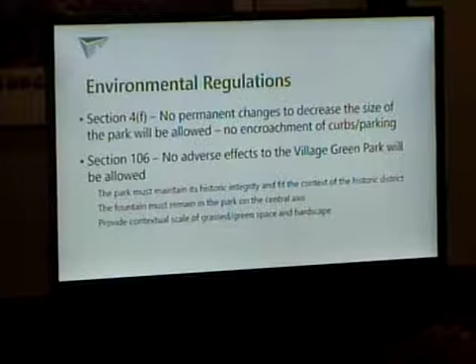Diving down a little bit deeper, that means the fountain has to stay within the park. It adds to the historic fabric of the park, and it needs to be on that central axis where it's located and where it's been in the design concepts presented. We need to provide a park with the right feel, the right contextual scale, and the right mix of grass and green space combined with hardscape. Consider that as we go through these concepts.

Very quickly, I wanted to touch on the process so far, where we are, and the next steps. We gathered a lot of information about the sites. We've been working on the project now for several years, as Jim pointed out, but really dug into this landscape design earlier this year.

In the spring of this year, we got together, brainstorming, with a public meeting in June. We developed design concepts as a team from June to September, and got back in front of the public in September to present those initial concepts.

We've gone away and, based upon that public input, done additional refinement. Mark presented to the select board in November, and as a result of that meeting, we got asked to present as well to the Planning Commission and the Design Advisory Committee. Also in November, and just last week, we refined the concepts a little bit further.

So here we are today, public meeting, December. Coming out of this meeting, a little bit more refinement, and then ultimately our goal is to present a recommended alternative to the select board at their next meeting on December 11th, so next Tuesday.

We're gathering all the input we've received through the project to date, input from the public, the environmental side of things, input from the town boards and committees, putting that together with some principles in landscape design and landscape architecture, and making a recommendation to the select board, ultimately asking for their endorsement.

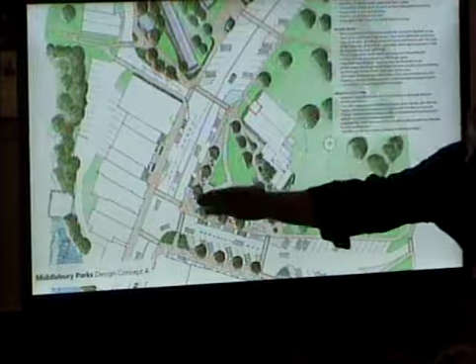Connectivity to both parks, to the riverfront and Marble Works. In this sketch, this is Main Street, here's Merchants Row, the Battell Block, St. Stephen's, down Painter's Alley there, Printer's Alley, that leads you to the riverfront area in Marble Works.

As Aaron went through, the inclusion of the historic fountain was a requirement through the permit process. Integration of the church memorial garden and connectivity of that back to the main part of the village green.

And this sketch here that we had is basically organized with street trees along the edge, 30 feet on center. What do you mean a street tree? Big, like canopy shade trees, to define the edge of the walk. There's a sidewalk along in front of that.

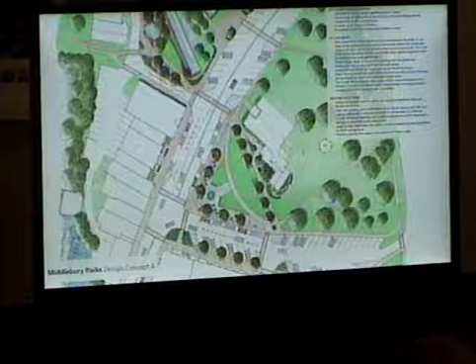There's the historic stone ashlar blocks we're reusing from the tunnel as benches. Is there a chance you could use the microphone? Well, the microphone won't help, unfortunately. These microphones are only connected to the recording equipment, it's not a PA system. Sorry, there's some seats up here.

With the desire to have more plaza space than what was in the original park, we made these areas 20 feet wide.

We're suggesting movable tables and chairs under those. The fountain got moved closer. This arcing path comes across through here. So this is all flat and one big plane, so you can use it multiple different ways. There aren't grade level changes going on in it.

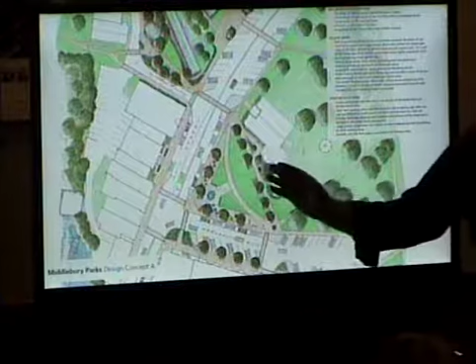Went back this way by the memorial garden. There's a row of trees here that are lower to the ground, like an apple or a flowering type tree. That allows some sense of intimacy back here, but you still look over those to the historic architecture of the church that's providing that three-dimensional architectural frame on the backside.

You go to the park, Lazarus Park. We showed a couple options here. Here's a simple path coming down at 10%. There's a couple seating areas and lawn, and then a hardscape at the bottom, and once again shade trees line it. That connects right across to these guys.

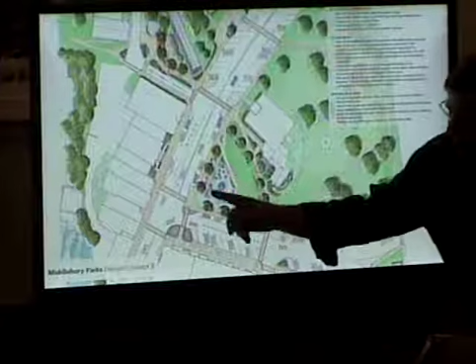The second option, after we talked with the select board, we made the hardscape plaza area even bigger. We still kept the street trees delineating the edge, which is a historic feature to the park, part of keeping that historic character that Aaron mentioned. Slightly different configuration here, and then a simpler layout down there where we're closer to the street and there's no lawn actually presented.

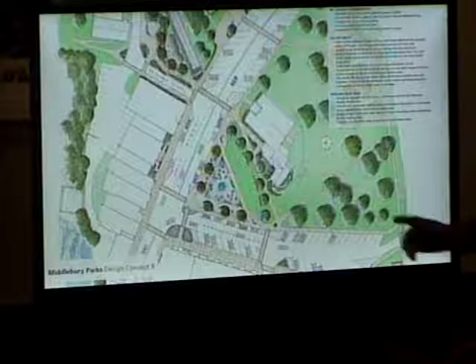You can see in both these, the fountain and the memorial garden are on the historic axis.

I think it's probably worth pointing out that these two options were developed following the input in the September public meeting. Mark had gone back through—you need to speak loudly for people—understood. Mark had gone back through all of the input received so far, all the input from that meeting, the ideas and brainstorming, and had really worked on developing these concepts.

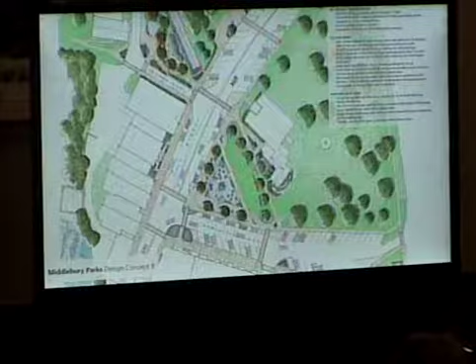These are the same concepts that were presented to the select board at the end of November and presented to Planning Commission Design Advisory Committee. And last week we received input from every single Planning Commission member and Design Advisory Committee member and the public that was there. And then I've made some adjustments to try and incorporate some of those ideas in.

So we don't have a third option, but as we had talked about for our process, we've got a working draft going for incorporating those main themes, making some tweaks before we get ready to present to the select board. So we're going to talk about our working draft.

Some of the main themes that we heard were to increase the hardscape in the village green beyond what was shown in Concept A, to increase flowers and plantings in the village green area, to include pedestrian bump outs at the crosswalks. They were shown on Merchants Row in one location, so to show those at additional locations.

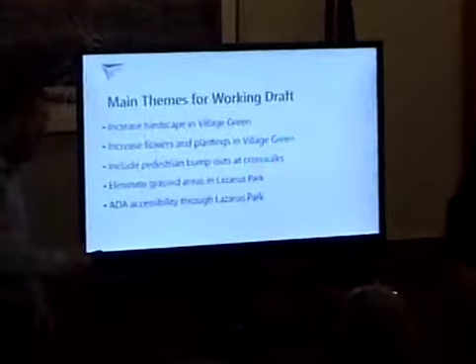What's a bump out? Talking about something like this here. Is it higher on the road? It's only about an inch or two higher. But a bit higher, so it looks obvious, is that the point? Correct. It's a different material and texture. Yeah, similar to what you'd see at the roundabout here. Right.

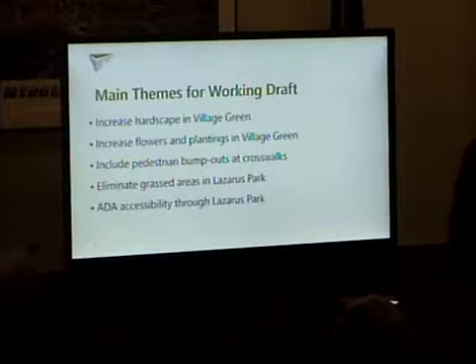Eliminate the grassed areas in Lazarus Park. There was a few comments about that—perhaps Concept B that was presented was better from a maintenance standpoint. There were also several comments about ADA accessibility through Lazarus Park. We're going to show you a concept that does incorporate ADA accessibility. However, it spills onto the neighboring property, so it's not all within the town property. There may be a possibility to work with the town on seeing if that's feasible, but to make that work we had to spill beyond our limits.

So, Mark, do you want to just walk through the modifications or changes that you made? Okay, so we started back with our Plan A and went through tweaking and adjusting things to try to adapt to what we heard from last week's meeting.

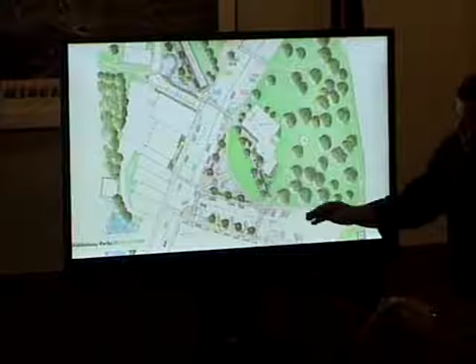In this scheme here, for the request for more hardscape, we incorporate—these used to be grass panels in this area, they become now more of a pervious paver material. The fountain moved even closer to the street, now 20 feet forward from its original position. I thought that gave much more flexibility to use for the whole centerpiece of the park.

And can we pause there just for a moment? Some of the coordination that we've done related to Section 106, that historic contextual feel of the park, coordinated with Judith on this—this is the maximum amount of hardscape that we can design into the project. So we've heard loud and clear, more hardscape. This is really the maximum amount.

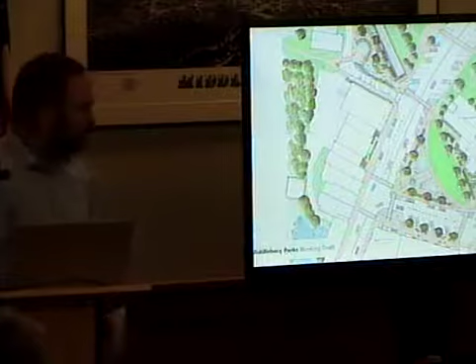Maximum based on historical concepts? Yeah, historical context. From a scale standpoint... hold on. So just out of curiosity, what was the rationale for increasing the hardscape as opposed to having more lawn and so on?

There was some sentiment that hardscape may provide for more versatility of use throughout the entire year. In the winter it could potentially be plowed, and in the spring during mud season it would still provide a stable surface.

For scale, the distance from here to here is about 60 feet, about the width of Church Street. It's a nice scale for an urban hardscape that still feels reasonably comfortable without feeling like you're out in the middle of a parking lot somewhere.

Going on with that, we incorporated the request for more flowers. Traditionally these edges had berms and plantings and a variety of plant materials, so combining use of the ashlar blocks with planters in front, while still allowing access into the park at each of these places. Those big stone blocks are part of the tunnel construction.

So, Mark, I wonder if we just pause there for a moment and point out the differences between concept A and this, specific to the street edge. Yeah, in this scheme you can see right here...

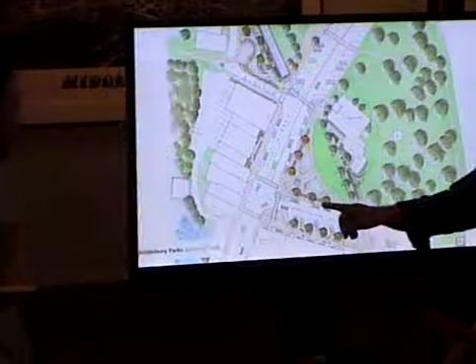There's a bench and then a flower bed in front of that. They could be pollinators, annuals, or perennials. Then on either side of the tree there are 5-foot walks and a flat grate, so it's 15 feet wide open. You can walk into the park anywhere you see a tree.

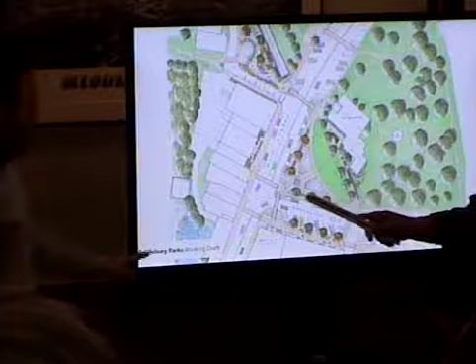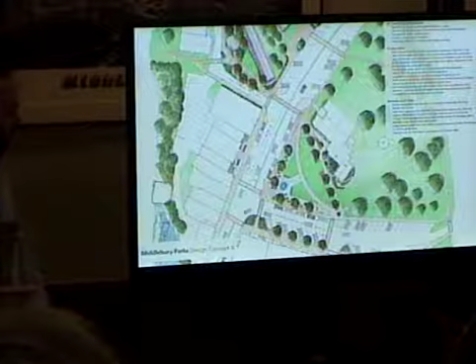Let's flip back to the other concept so you can point that out. In this version we were suggesting movable tables instead of the benches, and the ashlar blocks actually go perpendicular next to the tree, so you get roughly a 20-foot space in between for the tables and things, instead of the historic stone blocks.

Everything's still on axis. We've located the utilities on these plans because there's a lot of concern about connecting in and sweeping this corner. Unfortunately, this whole corner is one big utility bank of transformers and poles. There are existing utilities there today, pre-project, and we've actually added a single-phase transformer to eliminate the poles in that area, but it does add to the utilities there.

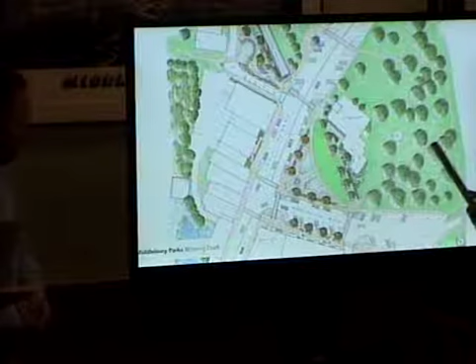But it's all coming together here with this existing path coming in, a new crosswalk across the street with a bump-out here to shorten the pedestrian distance. Over on this side, here are the bump-outs suggested last week, making it so people don't feel like they're crossing as wide a distance. That connects to this area at Lazarus Park.

We've opened up the front of this based on some of the things we said, and then it's calculated out. Handicapped access requires a certain maximum slope on a ramp, like 0.083, or 2.5 feet per every 30 feet. You can't go beyond that without needing a 5-foot landing area, so you need a certain length to achieve the 11-foot drop to get down there. This is worked out so you come downhill to a landing here, and then there's a path that comes back around the back side of that sitting area.

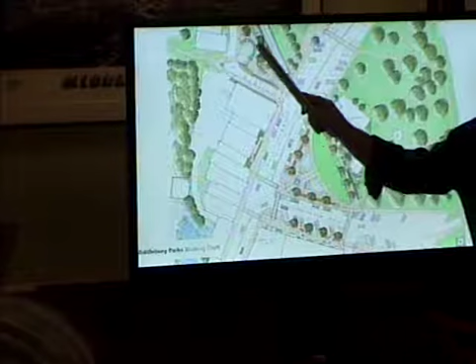And so we talked about potential property line issues. In order to make that work, we had to push really further onto the MarbleWorks property, as shown here. The project does not own that property right now—this is just kind of a potential solution. It's owned by MarbleWorks.

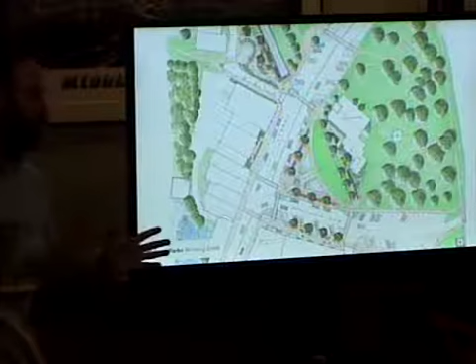Excuse me, Aaron, if we have questions as you go along, would you rather we hold them? I think you can—if you've got something specific about what we're talking about, feel free to ask.

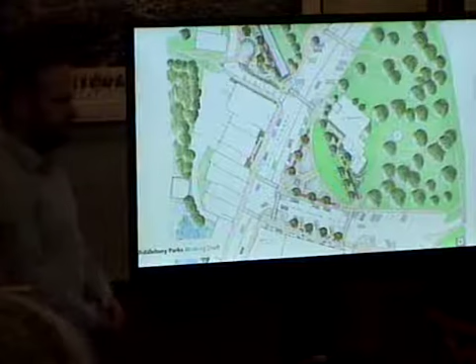My one question was, right now there is one utility pole right in what I would call the southeast corner—yes, right about there, except down a little bit. And there's one remaining utility pole. Is that going to be removed, and would it be underground? And there's another one that goes across up toward Main Street—will that still have to be there?

My understanding is that the utility pole would be removed. It will be moved? That's my understanding, yeah. Okay, I think there's one line that remains to service a...

Right, yeah, it goes light, right across the park. There's a light in the park and it could potentially be served from the Court Square area instead of from this pole. Okay, thank you.

Since trees are mentioned, I want to bring something up. A couple years ago, coming home from Maine, New Hampshire, part of Vermont, and into Middlebury, it went from beautiful to ugly, like the trees in front of the People's Bank and stuff like that. There was no color, maybe one tree. This year, I know we had horrible weather, but it was all yellow, all the way to Burlington practically, from I think Japanese trees, I don't know.

But we're not in Japan, and we lost our four most beautiful maples that were red in front of where we had town hall, and the two beautiful pines that were moved from there, and then the two beautiful maples that were between the library and that house. They all had to go. And what you're putting back is just yellow, short, yellow, ugly. They're not even pretty in winter when they don't have anything. They're just unattractive.

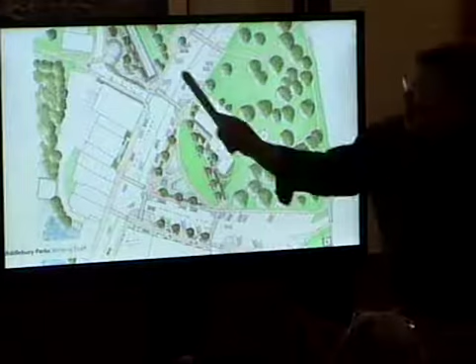Can you talk a bit more about Lazarus Park to the right of the sidewalk, what's going on in the design? This one is reflecting comments from last week about not having a lot of grass for mowing. In back of this path, those are big canopy shade trees backed up with masses of shrubs. Up in this area with the pink, those are more flowering trees in masses, and then again a couple layers of big moving masses of grasses or other native shrub material.

My second question is respecting the historical requirements of the design - do any of you have experience incorporating more creative elements that would attract young families and still fit within Section 106? For example, built into the shrubs, like a slide built into the downhill slope anyway. Have any of you experienced projects where towns are able to find funding to support something within the federal requirements, realizing the federal funding wouldn't support that type of design element? I'd love to have a bit of fun for young children right downtown, and I worry if we don't incorporate that into a new design that will hopefully stick around Middlebury for a long, long time, we're missing an opportunity.

I've had experience designing a lot of different recreation facilities, whether formal ones for parks departments, or natural play areas with logs and things like that, and state parks. I'm not sure within the historical context how you actually weave that in, or if the town, once they get a hold of it, adds something they want. Over here, that's really not a historical situation.

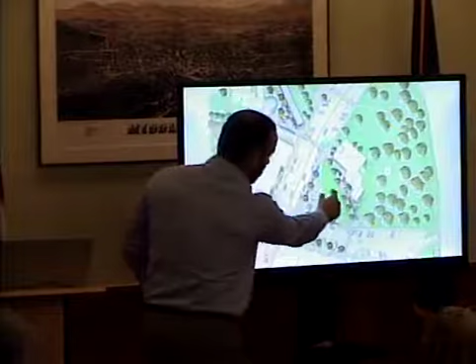There's a couple of things to consider. First is the replacement of the bridges is resulting in a tunnel that goes through underneath the green. It's hard to see, but there are dashed lines. We can't have the fountain over the top of the tunnel.

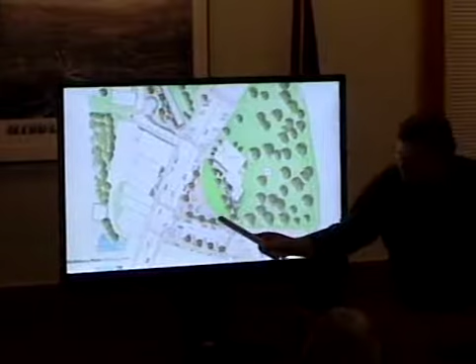So we really looked at the space between the tunnel and the edge of the street, to place it appropriately from the historic context, keeping it on the center axis, but also opening the space up as much as possible. Fountains are an attracting element for people, so along with that edge theory of the edge being comfortable, it opens up more visibility for people coming by to see it and interact, where we think people are going to be hanging out, and it keeps the rest of it open for a variety of uses for bigger events.

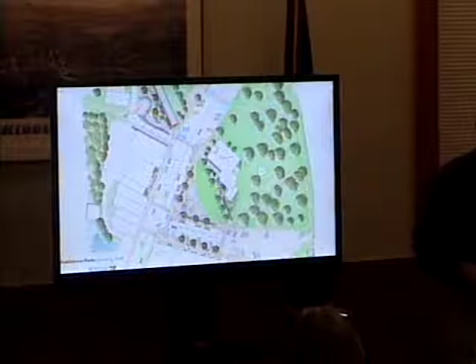Just to quickly note, I read the notes from the last two meetings and this one, and I haven't heard a whole lot of love for the fountain that's being replaced or brought back, the design of it, the aesthetics of it. I'm just wondering, and I feel like at the last meeting there was also a lot of critical comments about the fountain, so I'm just wondering, must we bring back this space? It seems like no one loves the fountain.

I do. I do too. I didn't know I was supposed to say. Well, maybe my kids do want to grow up with that fountain. So far I've just heard, I don't like that fountain. I've heard a lot of critical comments about the fountain design.

Historically, I think we have to have that fountain. The design of the fountain was first put out in 1908, stayed for a while, was dismantled, and then a similar fountain from a similar design and from the same original foundry was reinstalled in '76. The fountain has been part of that park for a long, long time. Does the '76 one that was installed look very similar to the earlier one? That's my understanding, it's missing a piece from the top, but it is very similar to the original, and it's considered a contributing feature of Triangle Park.

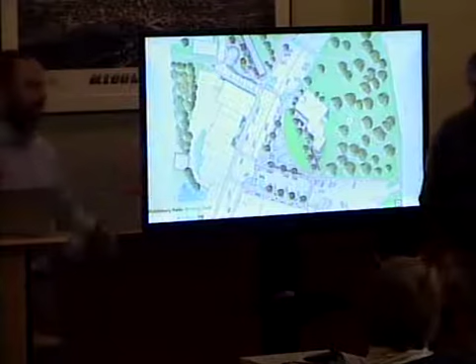And it would not fit with the context to move that fountain to some random location. Sounds a little bit more subjective, but I'd like to move on to my larger point.

We spend an awful lot of time in this town talking about parking. And I believe that angled parking on Merchants Row on both sides of the street would allow for a much easier use of that park space.

I understand the argument about not being able to decrease the size of that park. But I'd like to propose that this park is much larger than it used to be. There used to be a 20 or 30 foot wide by a couple hundred foot long cut that was not a park and was not applicable.

So the 300 square feet that it would take to put angled parking in is a drop in the bucket compared to the extra space being gained by covering over the tunnel.

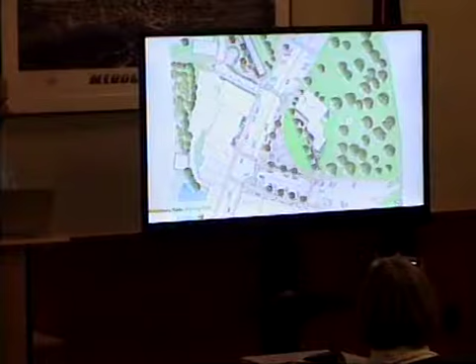Sure, and we understand those thoughts. Really, if you go back to before the railroad, the entire area was a park. So it's returning to that pre-railroad condition.

But that's not the justification for the funding, that's a different argument. It all makes up the historical context, though.

I can add to this, the 4F piece. What I'm saying is the funding is probably going to be gone if you were to cut in and add parking. So I think we should probably get away from parking because of the parks piece.

It's part of the environmental commitments of this project, and it's just not going to be possible, unfortunately. I understand that's a big piece, and you guys want more parking for businesses, to get that access. It's just to make that law useful, and it's tied to the funding, so unfortunately I can't.

To me, it sounds like an interpretation. I work on historical projects, I'm an architect. Those rules - if you make a strong case for why you're doing it and show that you're actually not reducing the size of the park, but enlarging it, there's a justification for doing that. So to me, it sounds like an interpretation is being used to substitute for a rule.

It's a little bit hard to hear. I'd like to build upon a number of the comments that have been made, and to ask a question first.

Could you, for a moment, further touch on the access from the main area through Printers Alley, going to the Marble Works and to Falls Park? You have not spoken about the sidewalk that leads up against the bank building, as well as that somewhat indiscriminate grassy area up on the building. Could you talk about that?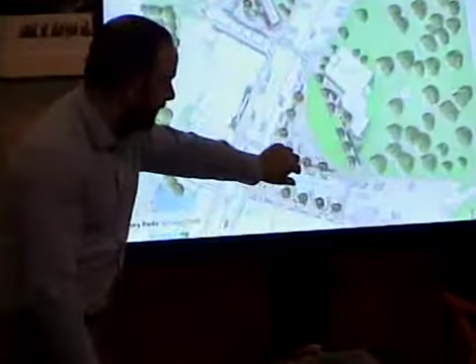That's not entirely true. We've got the existing angled parking here. The sidewalk is going to be doubled. If the sidewalk were where it is today, and we put angled parking here, it would make the travel lane very, very narrow, and it would be a hindrance for emergency vehicles and for pulling in and out of the spaces. There really wasn't enough room. We did look at that. There really wasn't enough room to get the angled parking and the travel lane within the existing space.

How wide would the travel lane be if that were the case? I forget exactly, but I think it was something like 10 feet. So what you're saying is the extra width here just came from not making this as wide. Right, if they hadn't given it to the sidewalk, the travel lanes would have been an odd width. So you gained usable space on one side versus just having an overly wide lane for cars to drive.

Thanks, Aaron. Last week at the meeting, I asked a very specific question about strings being attached to the design and use of this park based on the federal dollars being used to pay for it. Somebody answered me and said no, as soon as the town takes over the park, it's yours, do what you want, design what you want, change it how you want. But I'm now hearing something different, and I think we absolutely need clarification on that answer.

I think there are a lot of people in this room who haven't necessarily been part of the public meeting process and maybe don't fully understand that at some point we're going to get the best we can from VHB and the state, but that the planning for the future can happen in a more thoughtful, constructive way down the road. That answer is critical.

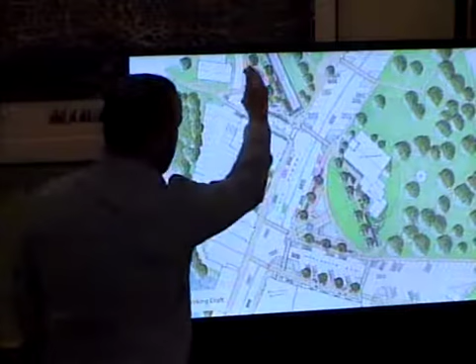I want to get back to the question of more parking. Will it be possible to redesign Lazarus Park so there's room for 2 or 3 parking spots at the bottom of the park opposite the building there, since Lazarus Park is not part of the historic town green? I think once we get around that corner, we're trying to get the right width for cars to travel through Printer's Alley. It's not really prudent to throw a few spots right on the corner, and once we get around the corner where you potentially could, it's on the Marble Works property, so it's not part of this project for the development of that portion of the land.

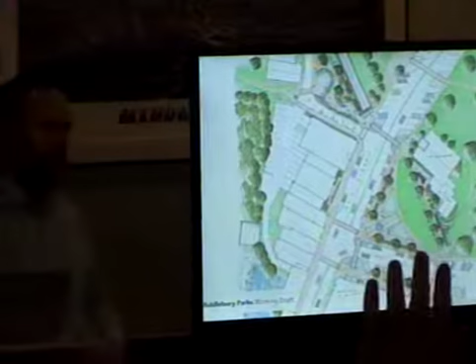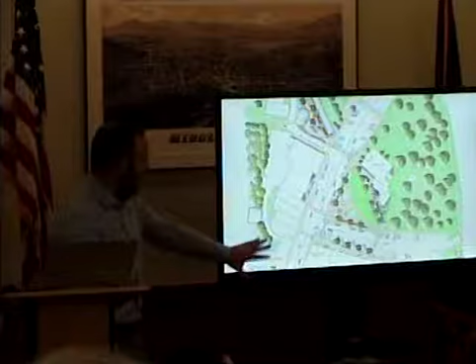Nancy: Hi Erin, I have 2 questions. One is, I wasn't sure if it was going to be an actual finished product or not - there was some talk that some of it would not be done or paid for. Is there any clarification on that? That's my first question. My second question - they're totally unrelated - is about the funding piece. As you see it here, this is something that would all be funded by the project, right?

Yes, including light fixtures in the Village Green area. Light fixtures for Lazarus Park would be on the town to provide. Are there other things we should know now are not covered? I'm trying to think - watering, water access, if there's anything else. I think what we were talking about is if the town wanted to have other amenities within the green space area, that would be on the town to install.

My other question is, we had talked in the past on the south corner of St. Stephen's, trying to incorporate the Triangle Park more with the existing park. Right now, the way that looks to me, it almost looks like 2 separate pieces, and I think a little more organic flow would give a lot more versatility to that space. But I thought I saw another drawing that you had where the trees were a little bit softer - that's in the tunnel, so there's a couple of constraints.

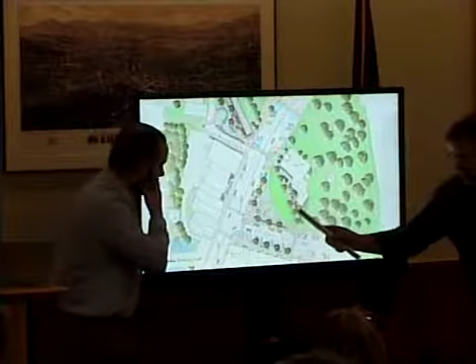The utilities, which are the gray boxes shown here, are not removable at this point. There's some space between the utilities and the church, about 30 feet anyway. There is the drainage structure there, an inlet, drainage inlet, but beside that, I think potentially we can open that up. There's the potential if you wanted to swing a path to connect to this one. Yeah, makes sense.

That's probably a walk there, right? People will use it that way anyway. Just like the comment from last week about how it didn't make sense to have grass in the corners because they'd be walked over. Likewise, that's going to be a path.

Did you say the power boxes are not movable at this point? No, they're not. One is a controller box for the street lights downtown. One is a single phase transformer - we got rid of the power line across Merchants Row, it's now underground - and there's a pole box there for telecommunications.

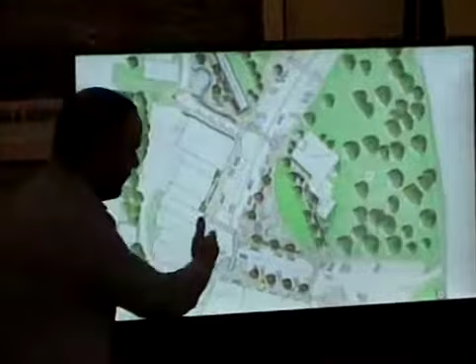I'd like to second what Nancy said. I think it's really important that there be an organic feeling from this corner park as part of the bigger park. People are going to walk there anyway, so if you could include that in your design, that would be helpful. There is one limitation though - I don't know if the town could pick this up afterwards - but our project limits are right about at that drainage structure. So if we bring a path that way, does somebody else have to finish it? It's a path to nowhere, right? We'll work that out.

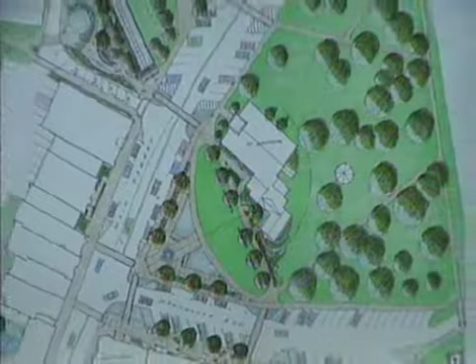But I have a question - there have been a lot of trees removed from our village green. So are those trees the number that are there now, or is that just a general sketch? Because I have a feeling there are not nearly that many trees. Are there more? There are more of the purposely planted and decorative trees. I think there's a lot of scrub trees that have grown up over time as part of the railroad cut. I'm thinking of the big one - the big green. That may just be a sketch, it may not be completely accurate.

I took that off the aerial photo and part of the survey we have, so it may not be completely representative. We're not touching that part of the green.

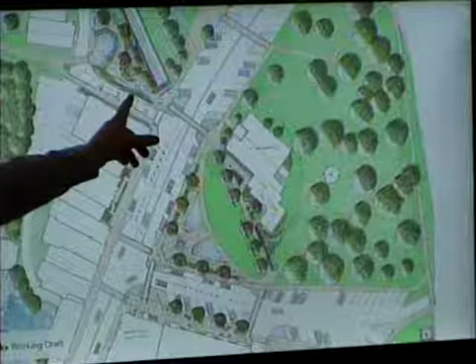So what are the widths of Printer's Alley in this concept? You're talking about the roadway? Yeah, 12 feet. So as of last week, the select board approved Middle Seymour Street as the new location of the train station. So Printer's Alley is now the main flat route from that train station location into downtown and the south side of town.

This will be a heavy route for pedestrian traffic and potentially bicycle traffic as well. At the last public meeting, you mentioned the sidewalk along the bank is 5 feet. Measuring myself on a normal bicycle pushing it up the hill, I take 3.5 feet. So the comment was any bicycles coming out of the Marble Works toward downtown would get off and push up the hill. That becomes a problem if there's a lot of pedestrian traffic. So we're setting up a situation where we don't really have great access coming out of the Marble Works. I'm hoping the roadway could be shifted an extra foot over to allow uphill bicycle access without impacting pedestrians, or leave enough room to get past cars coming uphill, rather than forcing people to ride against traffic on the one-way downhill or push people off the sidewalk into the roadway.

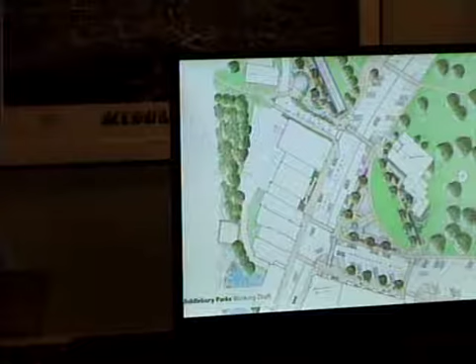So with that, you said the road lane width is 12 feet. A normal large box truck is about 10 feet wide - is that about 8 feet, 8'6" maybe? Because VTrans is using 11 feet for state highways, like Route 7 in new construction has 11-foot lanes. So going beyond that to prioritize more lane for auto traffic is above and beyond. And that's not for a one-way street - you're talking about Route 7, which has a lane, a shoulder, another lane on the other side, and it's not one-way. This is pretty standard and just about the minimum you want for a one-way roadway. Is it one way up or down? One way down into the Marble Works.

Yeah, I'm back to the fountain, sorry. Could you please show me with your ruler where the track is under the oval green spot? Right, like that.

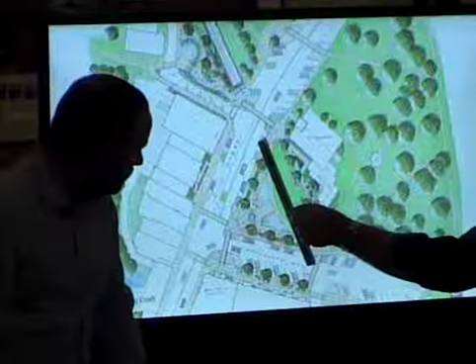So there really is plenty of room for a 12-foot fountain behind there. And in many respects, it's a very nice thing to have back by the memorial garden. It certainly is not out of keeping. And that might give you a bit more capacity to use that front piece that everybody is struggling to make bigger than it's going to be.

It seems to me that if you keep it on the historical plane, move it back, it would be a prominent feature there, but probably more out of the way of the kinds of things that people want to have happen up front. That would not be a historic issue, would it?

So there are several factors that we're considering in the design here. The fountain, remember, Triangle Park has been much smaller than what's being shown here. Well, I understand that, but the fountain was in the center of that. So its original location was fairly close to the intersection and fairly prominent to folks walking or riding their carriages through town in this location.

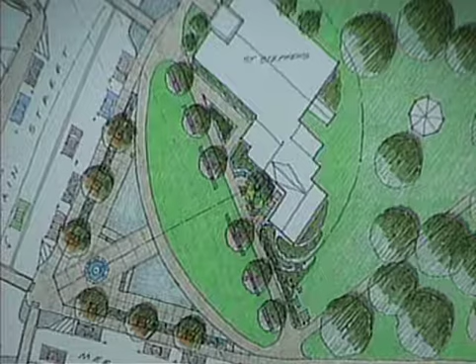Go ahead, Aaron. I think there is still a concern about the tunnel. I've got two points to make about that. One is, I want to get back to, we just got done with this discussion about making the base bigger, right? And now the sentiment is we want to use that space for something else. So I think we're as a team here trying to absorb all the comments, trying to put them together into a package that is representative of really all the input we get. So it's not just one thought or another thought. Take a vote. How about a show of hands?

Well, it's not always up to a show of hands. I think the other thing about the fountain and behind the tunnel, there are some logistical issues with utilities being able to cross the tunnel. It's very shallow, so water lines or drain lines being able to cross the top of the tunnel, bringing them around from the other side, could be an issue. There are ways.

Yeah, I haven't been here since 1976, so I can't speak to that. But I was listening to both of your comments about wishing to maintain the integrity of the earlier park, the historic significance closer to Main Street and Merchants Row. I'm not hearing a compelling argument for moving it further back, and I also haven't heard much of an argument for what will happen as a result. How will it impact by moving it back? How will it impact the activities that have yet to be identified?

I think back to pictures I've seen of various events that have taken place in the park over the years, anti-Vietnam War events, which have been right up along the perimeter of the street. I'm not really seeing why the fountain, which wasn't there in '68, I guess, am I correct, Peg, why that would interfere. So I think if someone here could make a compelling argument why we should move that fountain off axis, as was suggested, which doesn't sound like it's going to happen, or move it back 15 feet, maybe people would really hear it. But I would speak strongly in favor of keeping the fountain right where it is.

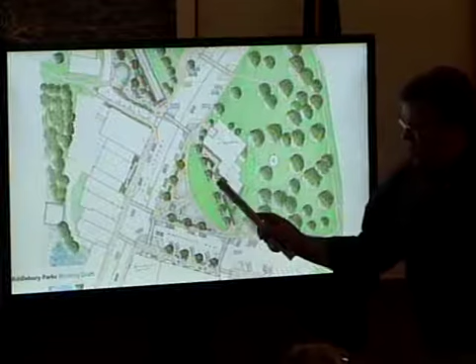Back here, the way we have it set up, this is a separate garden that was supposed to be a little quieter, a little place of contemplation, a little more private. Putting it in the center definitely disrupted it as they started trying to lay out other items, like, say, events were going on. This gave you two points, almost like dumbbells, for people to congregate around. If I moved it here, then the garden piece is gone. You can't just put two things right next to each other and expect they're going to be compatible. It's either one or the other. This way, you've got two separate spaces that are entirely different in feel from each other.

Okay. Yeah, I think that if it was moved near the garden, and we're trying to attract young families, and the fountain does attract children, then just like my grandchildren wanted to do, they're going to want to race around and round in the memory garden when we go to the green. So I like it where it is, or moved on that axis where it's still hardscape before the path.

And I'd like to know about the base, because I like the base. If I remember, if we were there with our kids, we could sit on the base where the kid was playing and splashing so they wouldn't drown. Yeah, it is raised off the ground. It is off the ground. So another point is being able to sit. If you want to attract, I mean, kids just like the green and the gazebo.

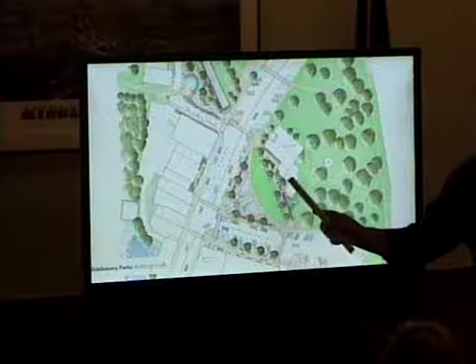I was also a little uncomfortable with bringing a public feature, there's a columbarium right here. It seems like a little quieter spot if you were there, you know, grieving a loved one or something, to bringing an active public feature right up next to you.

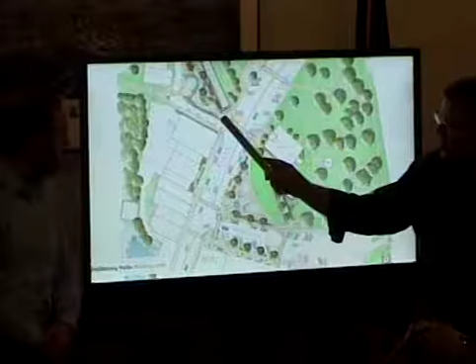Okay, I want to say something about the ashlar blocks and the hardscape. There are a lot of ashlar blocks available, but not that many are used in here. Could some be placed along the path in Lazarus Park, maybe? Actually, from last week, I added quite a few in this one. There's one running along the whole length of this. Oh, okay.

There's another one here at that intersection, and there's this one coming through there. This was a little bit in response to comments about vehicles jumping the curb or something, and the ones along the path in the park.

In order for people to have conversations, maybe there could be one bench at an angle to the other, or in front of the other. So it's not just one bench, but two, so people could have a conversation area.

And the hardscape, if that whole triangle were paved, I think it would really need something within it, like raised planters or trees, because it's going to be broiling hot in the summer and bleak and windswept in the winter. Even though a big plaza is flexible, it also repels people. People go where there's something to gather around. So I don't want to see any more hardscape than that, at least to start out with.

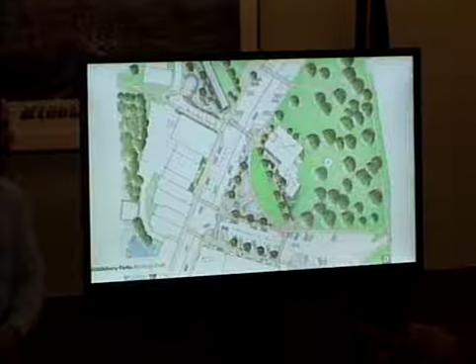Use the blocks in intelligent ways, but if they're going to be as rough as they are on the outside, the town will be funding cushions for them. For some reason I think the top surface is fairly smooth. Is it? And the surface that you see exposed is the rougher surface. Okay, well, make them comfortable, please.

The bluish colored surface, there's a different surface treatment just to the left of that curved walk. Could you describe that a little bit? Is that something that can be driven on, or what is it?

I was thinking of it almost like the granite cobble pavers, similar to what you might see in the middle of the roundabout here. So not that friendly for strollers? Oh, they can come in a variety of textures. What's it made out of? Granite, but also matching surfaces here at the bump-outs for the crosswalks.

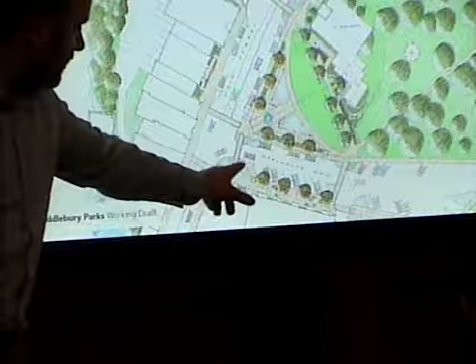This is probably picked to be rough on purpose, to create a rumble effect for cars. Possibly this would be a smoother surface. It'd have to be ADA passable, so strollers could go on it.

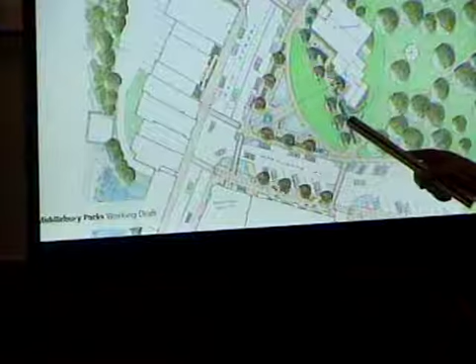And those, the control cabinet for the downtown lighting and the transformer, can there be some landscaping around those things? Since you put the transformer there, is that something you could justify? One of the things we were doing here, these are shown as large shrub masses, we were trying to screen this off from views from the park. Well, maybe that last tree would help, and with the other opening, if a little more thought were given to how you could both shrub around the utility structures but create some openings, so the line of trees or the wall isn't such a barrier. Yeah, I think we'll put some more thought into that area.

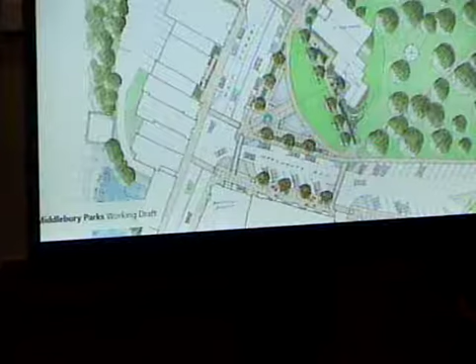I think all the way in the back, you've had your hand up several times. With regard to the different designs in the ADA compliant design, what is the impact described on the Marble Works property? How far is this property impacted by the ADA compliant design?

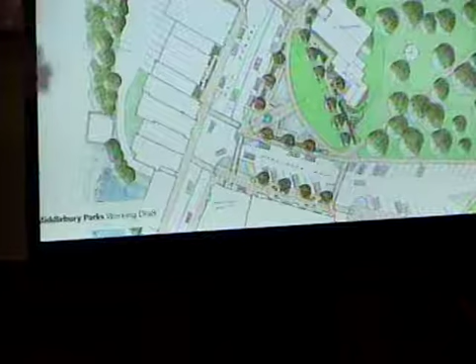Yeah, I don't know that we fully quantified how far. We just know that it is. Generally, do you have any idea? I wouldn't want to wager a guess on the area, but it is significantly onto the property, not just a little bit of a corner. I do like the idea of having an ADA compliant route behind there, for strollers, for folks using wheelchairs or other devices to get around. I think that would be really helpful, especially in downtown.

So could you take your bike through there too, in Lazarus Park? It's that kind of surface, right? I would think you could walk - it would be appropriate to walk your bike through there. That seems better than messing with the width of the road. I don't want to remove that sidewalk that provides direct access from Main Street down to the river.

That's all I have. Is there any place to pee? Some bushes - well, I'm serious. Ben Franklin had a great bathroom, but that's gone, and the diner closed. So where do you pee? Here in this building, this is a good bathroom. Oh, you can go here now? Yeah, it's open, okay, not in the evening but you can. I didn't know - Saturdays or just Sundays? Help yourself here. And anywhere else? The library. Okay. Just curious - you get all these people to come and then they can't pee.

So we heard a lot of folks talk about wanting more access to the fountain water as an attractive thing for kids. It sounds like we're constrained by the design of the fountain and its base. Could its base be recessed an extra foot lower and the pool made shallower, so the existing basin and marble - which has crenellations, some higher spots and lower spots - could be more of a wading pool around the fountain, retaining the marble but just shallower and not quite so deep?

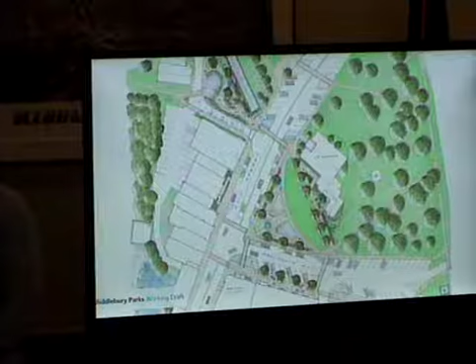So what I was thinking, if we were hoping for more hardscape for the farmers market and other big events there, and the fountain were moved back to the edge of the curve, it would seem far enough from the memorial garden, and it would mean children who've been running in the water would have grass in the warm time of year, which would be a lot nicer than hardscape. What do you think, Moms?

I don't want that fountain design for ages under 6. I'm going to avoid that park because I don't want kids jumping in and out of a nasty fountain. I don't think that type of fountain design is really designed for kids as a play feature.

It's not like a design for urban areas like Montreal where the water comes out of the ground and can be easily cleaned when it's turned off. I would say this fountain design doesn't make me excited to have kids in it, but thank you for asking. I'm staying quiet because I feel like we have to have the fountain, but the fountain is not a draw to me like a slide or a play pool would be.

I just want to piggyback on that, also as a mom of young children. I feel like you're absolutely right, and a fountain that does do that well is in Bristol on the green. That fountain is maybe a little more recessed, so kids are always in it, and it's so much fun, and it never feels like anybody's going to hurt themselves, and it seems clean. They clean it regularly, so it's nice. That's a fountain that really is a draw, but it's also next to a playground. So the only reason we go to that fountain is because we go to the playground. But when we're at the playground, we go to the bakery, we go to the stationery shop, we do all those things.

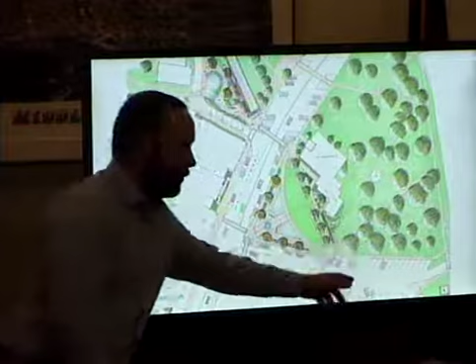And if you have movable tables or seats here, there's quite a few spaces and quite a bit of room, even extending further up. Mark's point about making rooms is a wonderful way to put it. Foodaroo has been incredibly successful in the Marbleworks parking lot—the trucks are all the way on the perimeter and everyone's in the center. So it takes all that energy and holds it in the middle, and that creates a space. When it's only on one edge, that energy dissipates into nowhere.

We're not a huge community, we're not a big city, so if you're able to hold that space, it really concentrates that energy in a wonderful way.

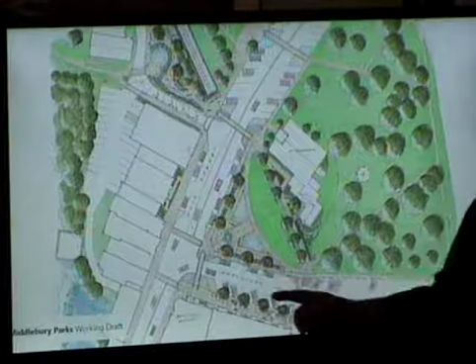If you had tables with activity happening all around you, you could. When I did it here as well, you had a central piece that hooked into these, and you could use that part of the sidewalk for cart deliveries off to either side of the tents. I think that's probably the biggest theme we've heard throughout all the input.

We want versatile space. You could have any number of layouts—tents, trucks, or exhibits—within the park on Merchants Row, trying to provide as versatile a space as possible while meeting all the regulations we need to meet. I think that's what we've tried to capture with this working draft.

In that light, I'd say those stone blocks would only get in the way of people going in and out, setting up displays, and moving tables. So you'd prefer the perpendicular version better? Well, just don't use the blocks at all—create space under those trees that can be used, with movable chairs and tables so people can sit there when there's no big event.

And my other thing I'd like to say is when you get to lighting, please be minimal.

This town has a light pollution problem already. I live 2 miles away and I can see the glow on the clouds. There's no such thing as dark at my house anymore because of all the lights coming from the village. And a lot of it is from our non-complying streetlights, which are cute but non-complying.

Don't add more. Keep it to what it has to be, but with fixtures that are truly downcast, and maybe those low bollards that are already in the park.

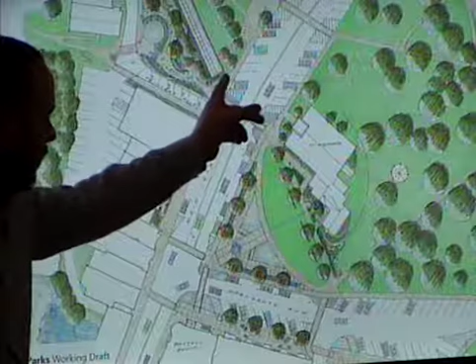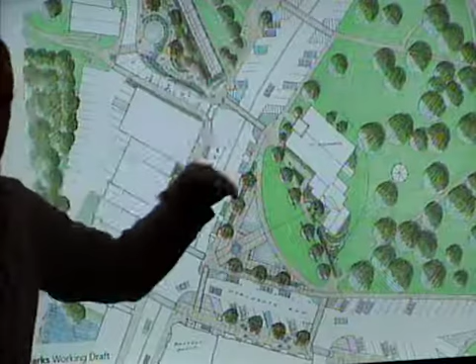Similar. At the end of the tunnel, right now we're looking to have kind of a low height concrete wall, and then vertical steel railing on top of that, extending along either edge of the U wall, with full height vertical pedestrian fencing.

It's a decorative fence, though. Correct, yeah. It's not like a chain link or anything like that, and the idea would be painted or a darker color, something that would fit with the historic context, something very simple. But in actuality, when you walk the path down, you have a filtered layer of landscape shrubbery, vegetation, from shrubs to flowering trees or canopy trees.

What is defining where the drop-off is so close to the main street? That would be the partial height concrete. No, no, I'm sorry, you're misunderstanding what I'm trying to say, or I'm miscommunicating, I should say. Is it the depth of the tunnel? In other words, why is the opening so close to the walkway? Could it not be further back?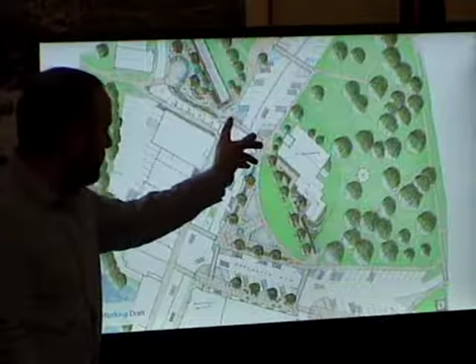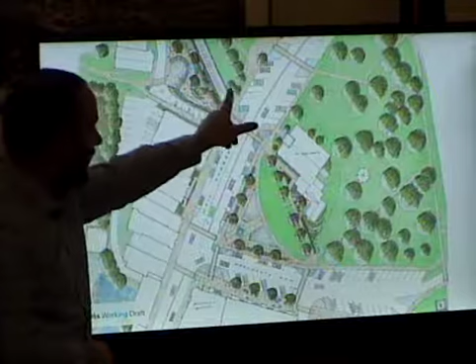The reason it's here is because if you think about the vertical profile of the railroad tracks, at this point the low point is roughly in this area. So the railroad tracks are ascending upward as we go further north. At this point here, if the cover on top of the tunnel were to continue, it would also continue up as we move further north, which doesn't match the grade of the surrounding land. So now you'd have this concrete box sticking up above the land. So this is the point where we're burying the concrete box, and then the retaining walls on either side will slope down with the slope of the surrounding land.

And that slope was determined by the considerations for the trains, I presume. Just by what's there. In other words, while they're digging, couldn't they have dug a little bit so that recess could have been further back? Well, the surrounding land is what it is today. And the reason I say that is it certainly would be helping the profile if it had just moved back whatever distance and you had plantings in front of it, so you didn't have to look at that, and also for sound purposes and the rest.

And then secondarily, I had asked about that curved hardscape. What is your intention there? This year? Yes. This is something that's kind of carried through several of the concepts. It's not necessarily defined, and maybe it's hardscape. If the right-of-way or property line issue isn't resolved, then perhaps this turns into a grassed area. I think right now it's just a generic hardscape, some seating around the outside, and then a backdrop of trees and shrubs.

Because it's an interesting concept, you're actually introducing people, I think, more easily to the Marble Works and the Falls Park by doing that. But I just feel strongly that the promenade aspect coming off Main Street is important, and the width of whatever that walkway is, is very important. I support the idea of people coming from the new train station comfortably into the municipality, and secondarily for the handicapped, for the bicyclists, for the strollers, that they have to be comfortable and inviting people in to use that more readily. It's a terrific potential for a thoroughfare.

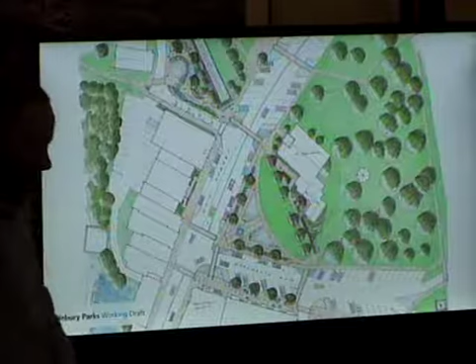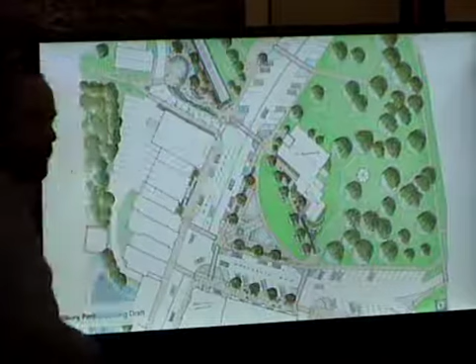Part of the pipe will still be visible, but beyond that partial height concrete wall, there'd be a ledge at the end of the tunnel. So the pipe will run across, come up out of the ground on the post office side, run across the edge of the tunnel beyond the partial height concrete wall, and then go back underground just to the other side. It's visible, it's not going to be covered up? It'll be insulated, but it's going to look like a pipe that's insulated.

There's no way to make it more attractive? Well, there is, but there's not a lot of options to necessarily make it more attractive. I think the curved roof might even look better than that.

It used to have a fiberglass cover, and that was its insulation. But rather than describing something angled, you could have something that steps up, covers the pipe, makes an elevated sort of plaza, place maybe for a vendor or something, and then resolve the grade towards the post office. We've got plenty of land and public right-of-way to do that.

But I understand coming towards the National Bank, that grade change wouldn't be passable unless you made some steps down in that way. But there's a way to cover that over and still maintain the clearance over the railroad, right?

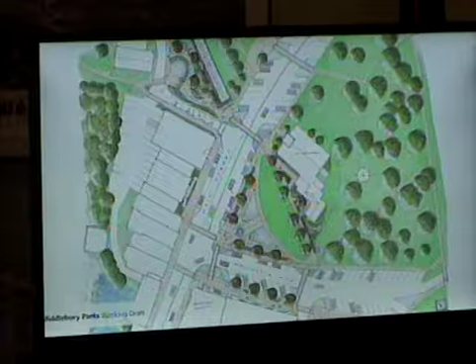That's an interesting concept. So there's the physical properties which you talked about before, but then there's just how much of that contributes to the actual project, right? And I'm not sure that extending that roof for the sake of additional public space would fall under the scope of this project.

It's more structure to maintain. There's the issue of the grading on the National Bank side. It doesn't seem like it's feasible.

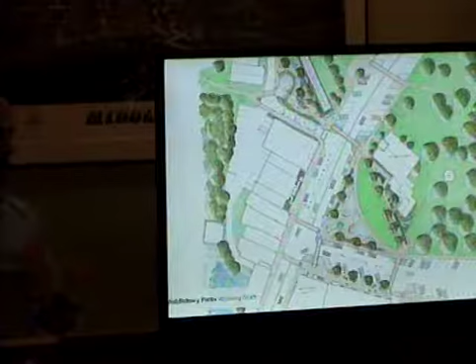Could you look at it though? Could you look at that? Because, to Fred's point, it's a real eyesore the way it is, and this is extremely important. This is the center of our town, and if there's a way that it could be enclosed and made more attractive, then why not? I understand that point, it's been made before. I just don't think it's part of this project to be able to extend that further.

There's a couple of things. As we discussed, you've got the rising grade of the concrete box, and you've got the falling grade of the surrounding land on the National Bank of Middlebury side and on the post office side. We cannot increase the grade along the post office—they have an entrance that needs to be maintained to their basement, and that's been made very clear by them. So the geometry doesn't work out to continue up, keep the clearance, and have the cover. You end up with a concrete box sticking out of the ground.

But the step-up concept does have merit, and design-wise, I think it's an interesting concept. You should consider it.

Well, it sounds like you're saying this is not part of your purview with this project, but could you design it in such a way that it would be easy and less expensive for the town to do something after you're done with your project and gone? I'm going to say no, because this is owned by the state of Vermont, and the state would not necessarily allow the town to continue and build.

Well, I just wanted additional cover to hide out the pipeline mostly, that's what I was thinking. Oh, we can look at alternative ways to potentially camouflage or hide the pipe. But for extending the cover, that's not something the state would allow the town to do afterward.

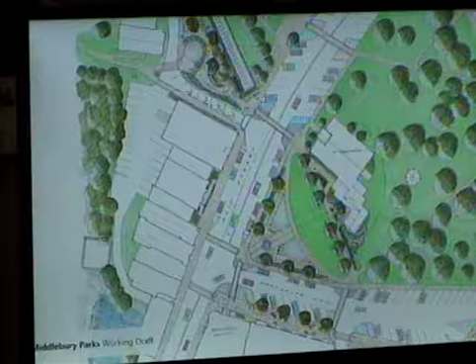If there's not room in the road, could that become a path? I'm not exactly sure the exact width you need for a multi-use path, whether it's 8 or 10. If it's 10, it's probably a little big. Well, we have sidewalks throughout town, everywhere other than Main Street, where scooters and bicycles are allowed - they just must yield to pedestrians.

My hope is that if we're making a path through there, we don't arbitrarily restrict the width so much that when passing a pedestrian there's a fear of handlebars catching. If we can make it 10 feet wide, it becomes a lot more usable for two-way travel, and will give you a better chance of getting uphill on it. The cross street bridge sidewalks were 8 feet generally.

And with the railing, those are a little narrow, when we see kids riding to school. We've come a long way from the original 5 foot.

In conclusion, I'd like to respond to Amy's comments - to design a project like this with the understanding that this is the best we can do for now, I don't think is a healthy attitude. I really think the community has to do the best they can to be as decisive as possible, to create a great park, a great streetscape, a great access and thoroughfare from one area to the next. We shouldn't settle for 'this is the best we can do for now.'

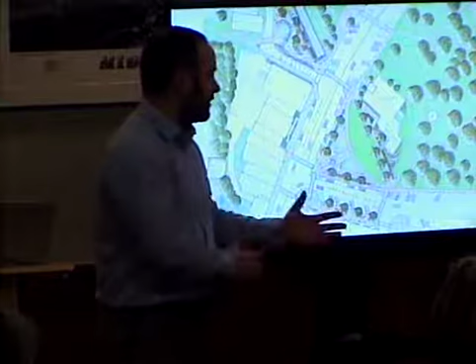There will also be the street lights that are along the edge of the street. We're actually just talking today—I think there's some lights that can accommodate in the poles, outlets and potentially locking enclosures so that the town can. How about along the walk by the church, back walk? Will there be lights there? We haven't gotten that far in the design yet, but likely very low level, non-intrusive lights back there.

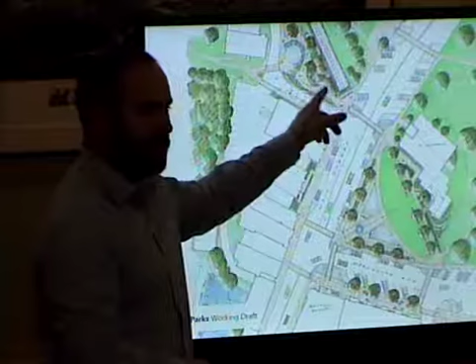That's something. And in Lazarus Park, on that walk? So Lazarus Park, we are committed to working on a design for this, but the project won't be installing the light fixtures. We'll install the infrastructure for conduits and bases, but then installing the fixtures would be paid for by the town. Yep.

All right. Is there any opportunity for unique paving patterns or colors? Like, I feel like I agree that this plan is good. It sort of sweeps the fountain towards the street and makes it part of the edge. I agree that people hang out at the edge, not on the middle. As far as a play element, it could be something like stumps along in between the trees in the back. I mean, I don't think a playground is right for this space, but even if that arc had, you know, 2 different colors of paving, that is now a play feature that kids are going to step on and jump through, and they'll play on it if it's a different color or whatever.

I agree that the connection around the church into the green could be a little more loose. The paving could even disintegrate in a way, because you have path and structure into green, so it should just sort of—you could make it a path to nowhere almost intentionally.

So I agree that the fountain, if you put it in the back past the tunnel, it'll be lost, it'll blend into the church. You won't see it, and it'll conflict with the other garden too. I agree, treat the fountain like the trees in the street - it's good, it sweeps out the space so you can do whatever you want in the middle.

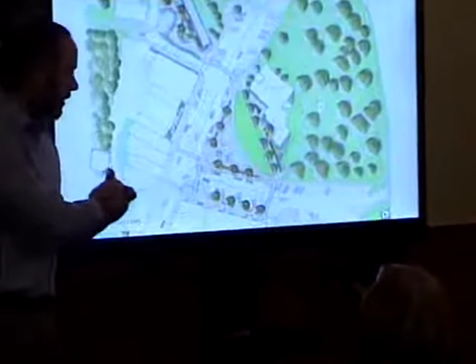Sure, Aaron, you want to walk through it? Yeah, so this is our working draft. We obviously got a lot more input tonight. I think a lot of what we've got here really fits with the major themes we're hearing. There may be some small tweaks - along the street edge, or different configurations for benches or flowers. But our intent is to take this working draft, make some tweaks and modifications, and then when we get in front of the select board, we're going to recap the process we've gone through, the input we've gotten, and present our recommended alternative, and ask for their endorsement.

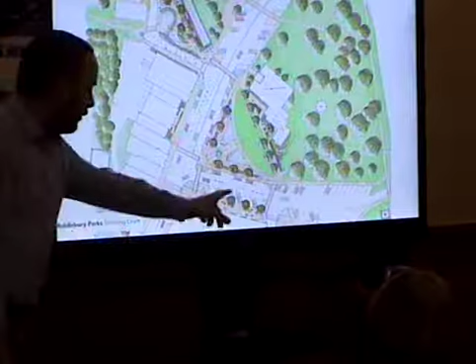It doesn't mean the select board can't say, look, we really don't like this, we'd rather go back to the perpendicular benches. I think there could be little things like that, but we're looking for endorsement of the main concept here.

Will the design advisory and planning commission notes make their way to these guys before the draft is finalized for the select board? Yep. Okay. Yeah, they're both meeting later this week - one on Thursday and one on Friday.

Noon, and we'll draft it then. I was just thinking of the timeline - so when you guys are done Friday at noon, does it go to the select board directly? No, that's not what I'm asking - I'm asking if the comments from those two groups will go to Jim. Jim's got an action item to get it to us on Thursday and Friday. I think staff can handle that for them. Yeah, and then Mark's got all weekend to look at it. Natalie, just make sure anything you write goes back through me, and then I'll make sure it gets where it needs to go. Okay, Mark's got nothing else to do this week.